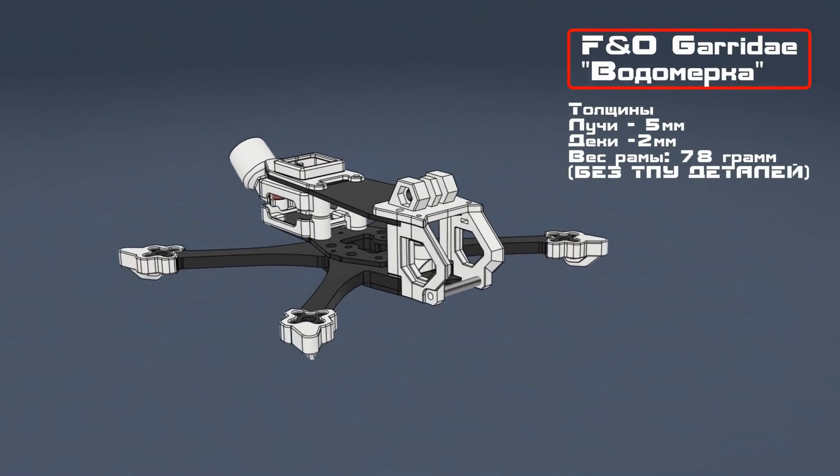Hello everyone. Finally, a full presentation of the F&O Garridae frame, also known as the waterstrider. Dimitri and I have finished all the finishing touches and the first batch already ordered is on its way to us.

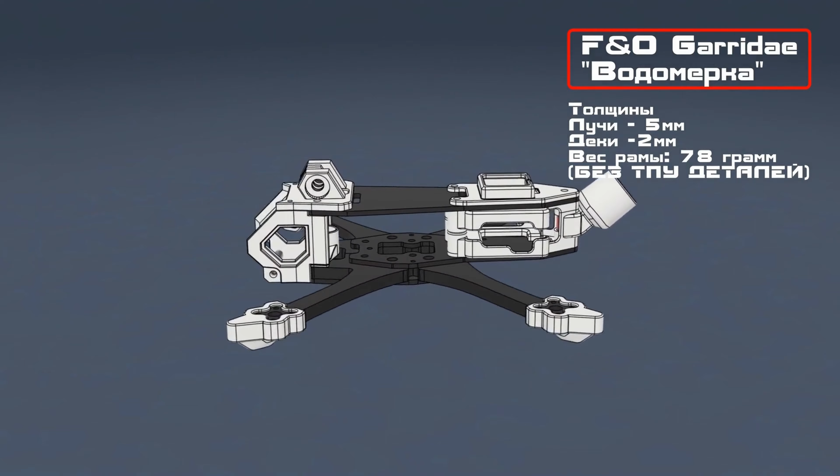We tested the layout on 3D printed models to compactly arrange everything, allowing cable routing for peripherals and power wires. You can install a mini stack with a 20x20 mount or a flight controller in the AIO version. Video systems have universal mounts targeting the O4 unit, with a 20x20 mount for other digital or analog video transmitters.

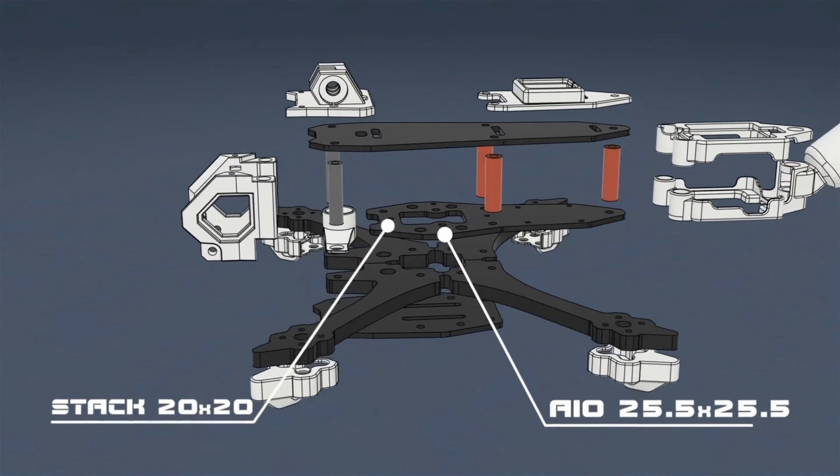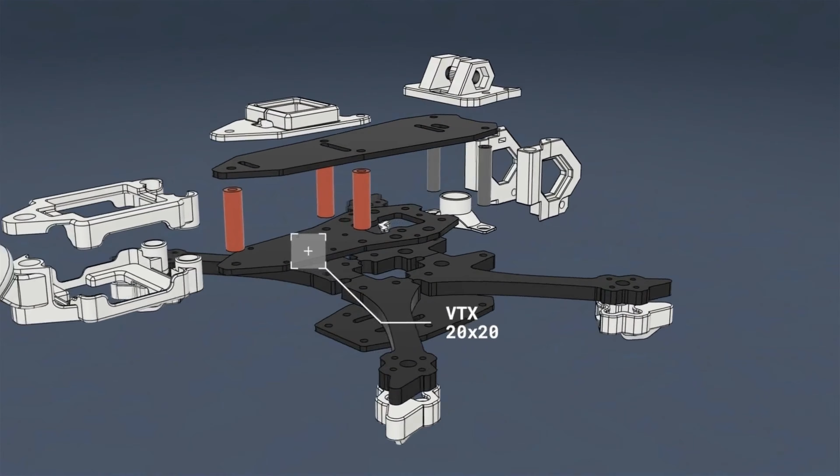The main target is the O4 unit. For the rest, a 20x20 mount for any other digital video transmitters or for analogs. The camera mount is designed to be as versatile as possible due to 3D printing, so you can place any type of camera you want.

Yes, the O4 unit camera will fit perfectly, just like the transmitter itself. In the target configuration, the battery is intended to be placed transversely. There were such questions in the chat, so I'll answer everyone here right away.

This arrangement allows you to gather the entire mass as close to the center of gravity of the device as possible, which in turn reduces the load on the motors. Plus, this arrangement frees up space for an action camera and a GPS module, which are placed on the top deck. As for the motor mounts, there are strictly 12/12 holes.

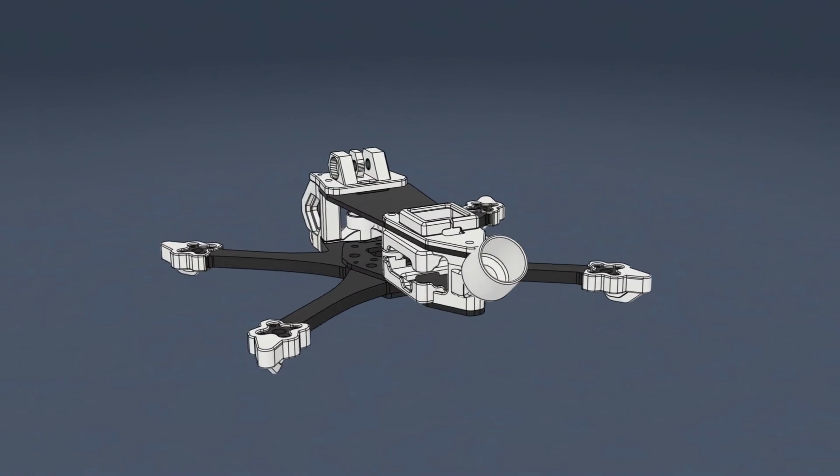Yes, I know some would prefer larger ones, but we decided to keep the frame in the category of mid-sized motors. Fewer holes in the beam means more strength and less chance of bending the motor out of its mount.

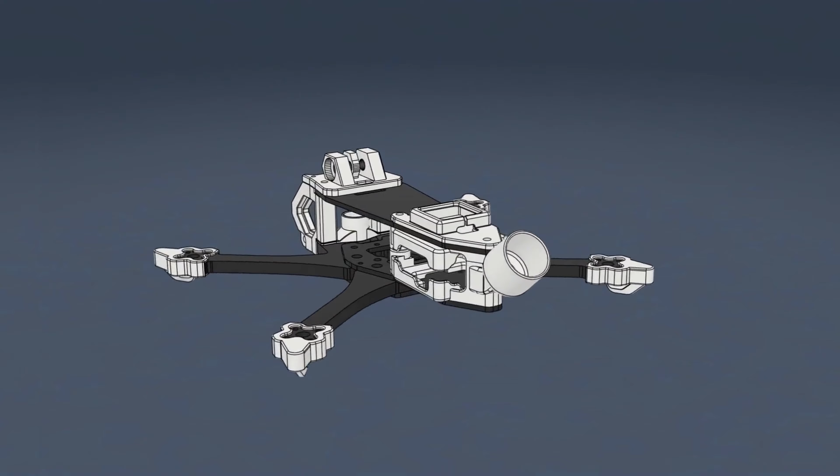In the center of the frame between the beams there is a seat for the receiver. The original dimensions suit the Radiomaster RP4TD receiver, and smaller ones will fit. A 3D model is included for reliable placement, accommodating most receivers.

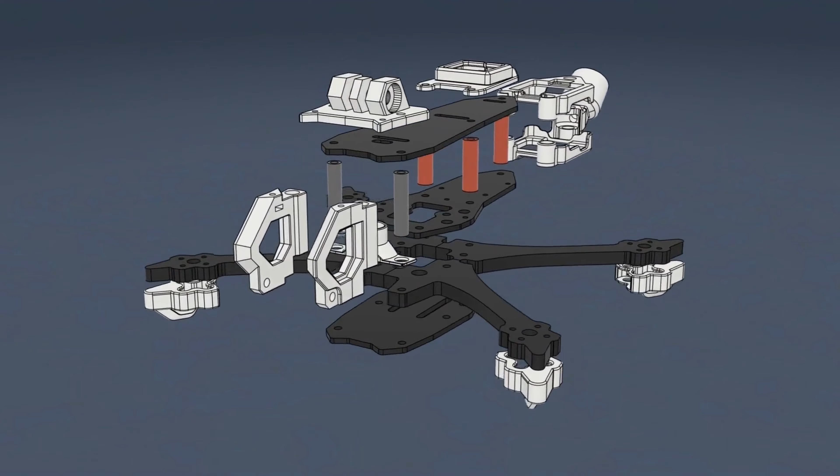As for the antenna mount, experience has shown that on such a small frame, antennas on a long tail tend to wear out much faster than everything else. So the plan is to hide the antenna in the protective casing and shorten it. To do this, the user will need to carefully remove part of the tube.

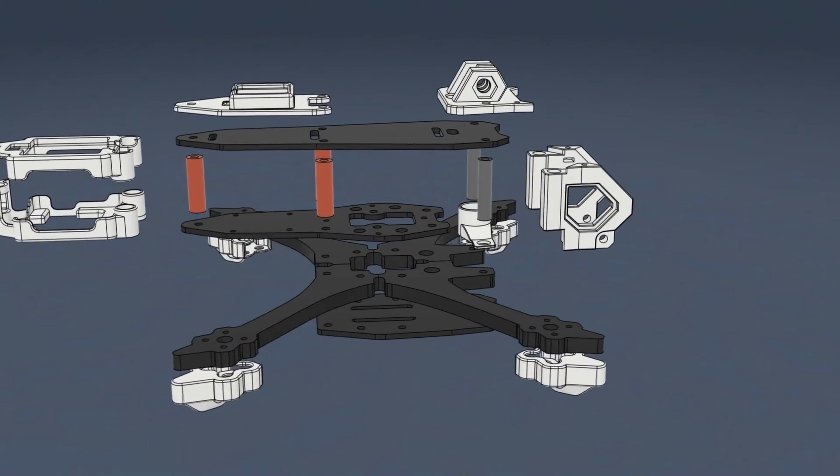There will be enough space in the frame for wire routing. The mounting points and beam supports are designed to prevent the beams from spreading apart during multiple crashes. The mounting points for the stack and the flight controller are as independent from the beams as possible. The more boundaries there are between different environments, the fewer parasitic vibrations will directly affect the gyroscope.

So how is it? The surface is smooth, almost like the finest silk or a calm sea. It feels incredibly smooth too.

Responsive, absolutely. Quiet. Cute.

Did you happen to notice that particular thing over there, just staying in one place without moving at all? It's quite fascinating how it resembles a really narrow and tight race, isn't it? And this is on 4S.

Wow! Listen, seriously, just please, I'm telling you, it's so smooth, right?

What exactly is happening now? Oh my damn, that is surprising! Just look at how really very smoothly it goes. And right now, it's on default settings for me, so I haven't changed anything.